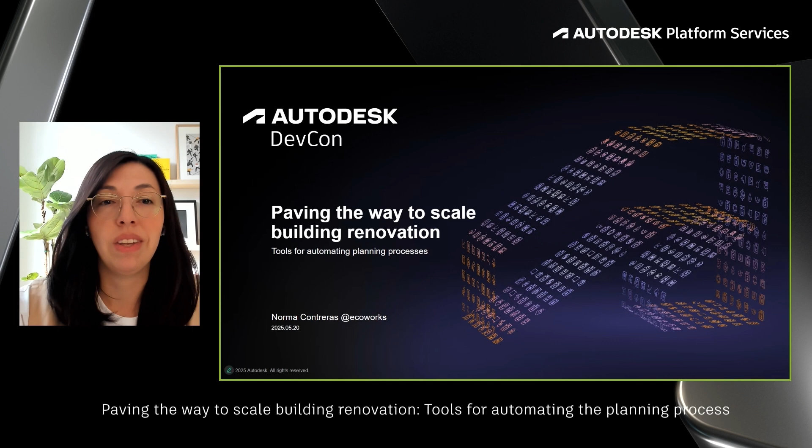A quick intro: who is Norma? I'm an architect from Mexico City, currently living in Amsterdam, and I'm a food lover. I'm passionate about design, architecture, editorial, graphic, you name it. I love details, and I'm constantly inspired and sometimes overstimulated by how design and tools are shaping our world.

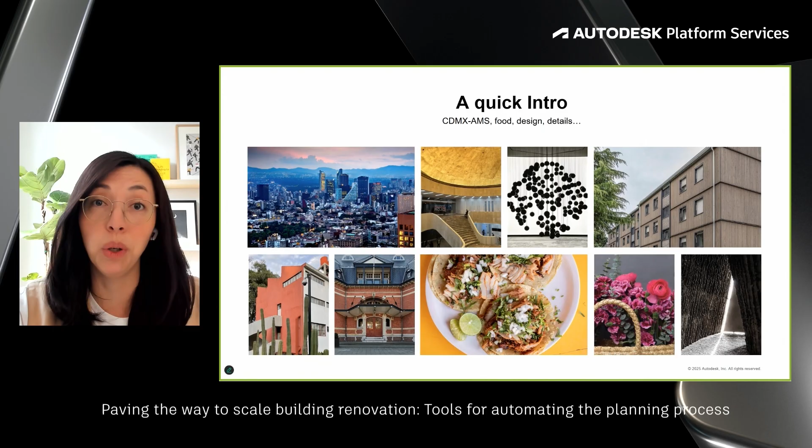I want to start this lightning talk with one question: have you ever felt overwhelmed by all the tech options out there to improve our processes? I do, and my team feels the same. So how do we choose or develop our own tools? Over the next few minutes, I'll share how we are navigating through all these tech options at ecoworks by answering three questions: why we want to optimize our processes, why we developed our own tool, the Revit TaskChain, and how the tool is working.

So let's start with the first question. We are facing a global housing crisis. We need scalable strategies. The European Green Deal is pushing us toward climate neutrality by 2050, aiming for Europe to become the first continent to have cut greenhouse gas emissions by 55% over the 1990 level.

In the Netherlands and in Germany, efforts focus on both new housing and retrofitting. I'll talk about Germany because it's ecoworks' current market, and the challenge is clear: Germany needs to triple its renovation rate to reach climate-neutral building stock by 2040. Something conventional methods cannot achieve.

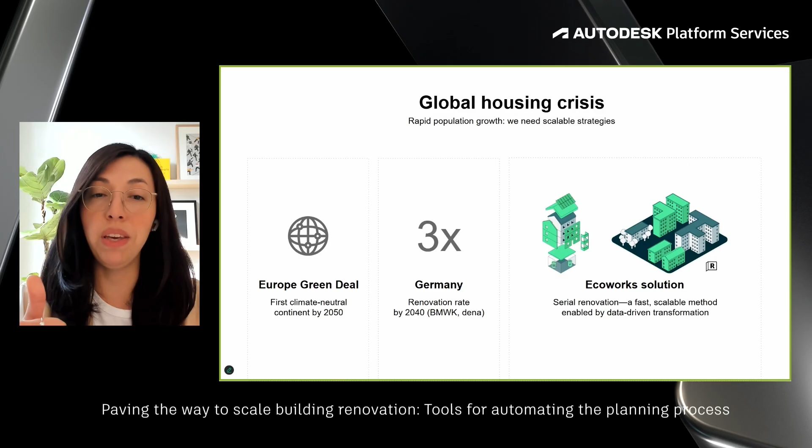Following with the second question, why did we decide to build our own tools? More software is about to be built than ever before. We have seen an explosion of new technologies. We have Revit APIs where users can prompt inputs, triggering cloud-based automations. We have Revit AI helpers, we have assistants. There's even a database collecting all the AI tools around the industry. And there are other firms and companies developing their own tools. With all these options, it's easy to get overwhelmed.

That's why the first step is always the same: clearly define one of your problems. For us, that means we need a repeatable process, a chain, streamlining planning, and automating Revit workflows.

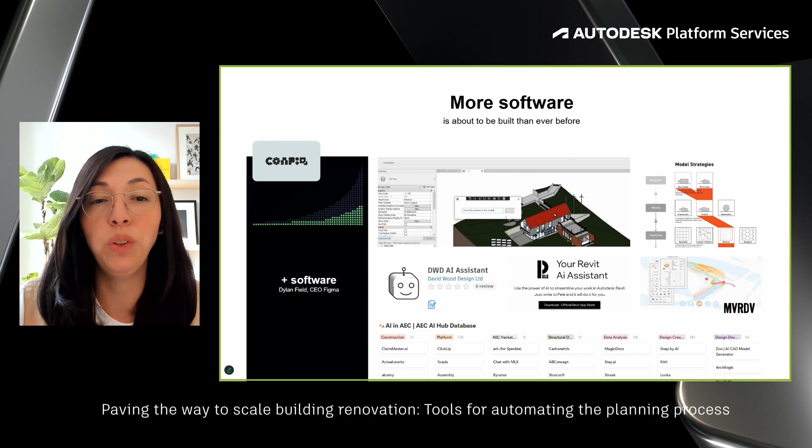So let's take a look at how the Revit TaskChain works. Think of it as a copilot guiding you through the planning process with structure and clarity. The tasks are gathered in our database, which feeds into the tool, generating a structured checklist.

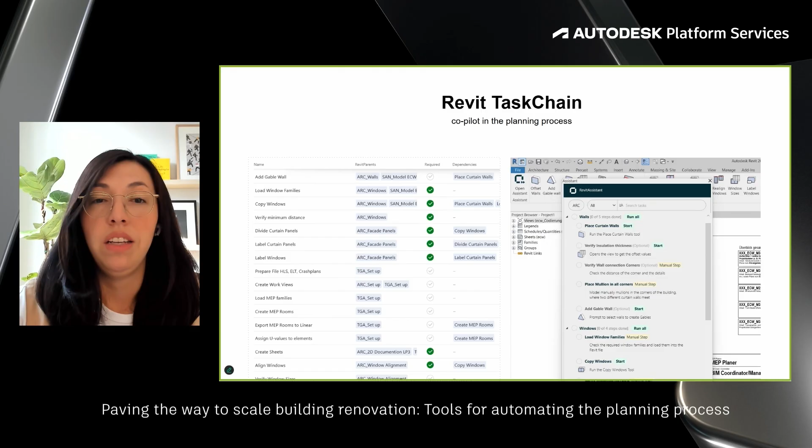So users can immediately see all the tasks they need to do. This structured list is color-coded, so users can immediately distinguish between automated and manual steps. When an automation is available, you can easily trigger it directly from the checklist. Under the hood, we are using Revit APIs to automate workflows, keeping the process consistent, standardized, and reliable across projects.

Here we have a real game changer: the tool, the Revit TaskChain, evolves with every project. It is a living tool. The user can update tasks and refine workflows. It's more than automation—it brings consistency, quality, and also the right amount of flexibility, making each renovation smoother than the last.

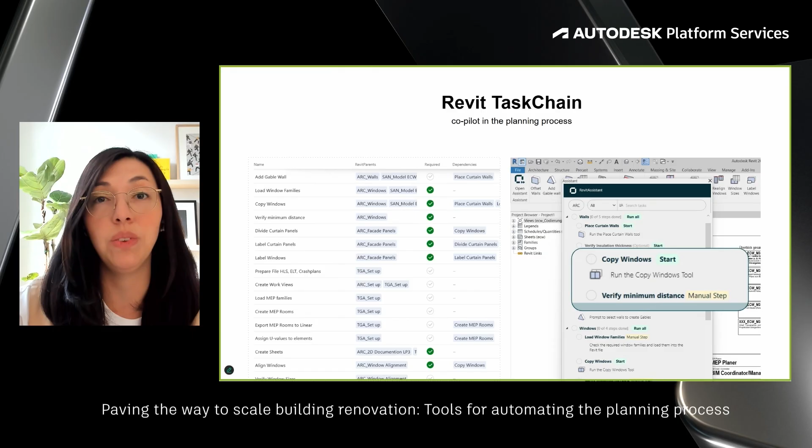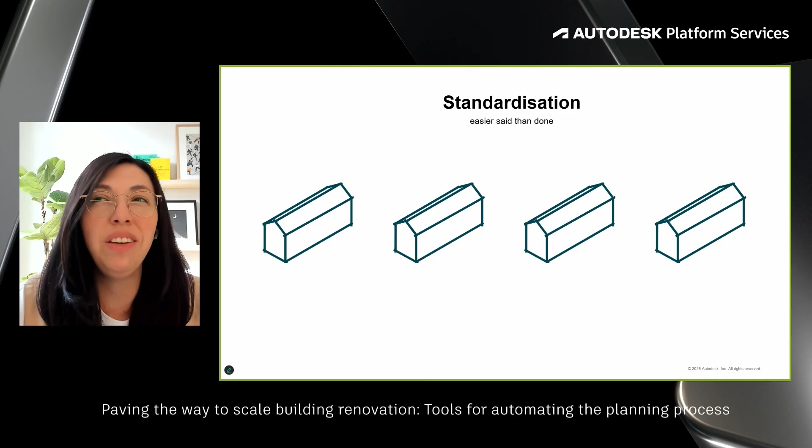To achieve this, we need standardization. But as anyone in this field knows, it's easier said than done. Think about German buildings from the 1960s and 1970s. On the surface, they might seem identical—spoiler alert, they are not. Small and often undocumented construction details shift how we plan, and these slight variations have a big impact on how we are planning.

So we have to ask ourselves: how do we optimize this complexity? How do we keep things scalable and adaptable? How do we combine everything into a chain? That's where our tool comes in. Let me show you our tool in action.

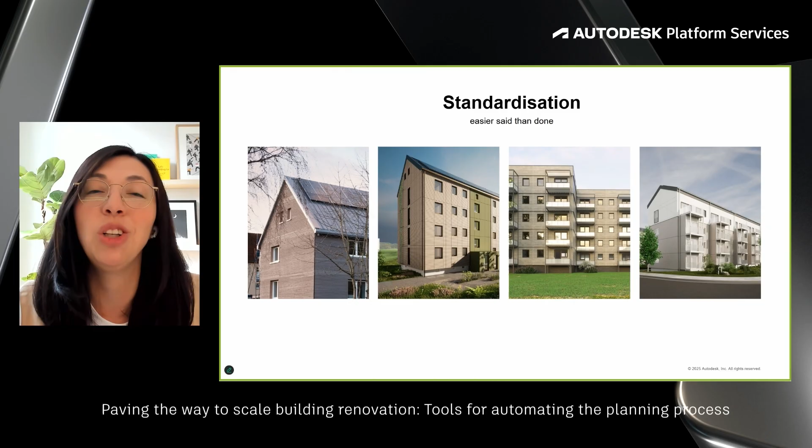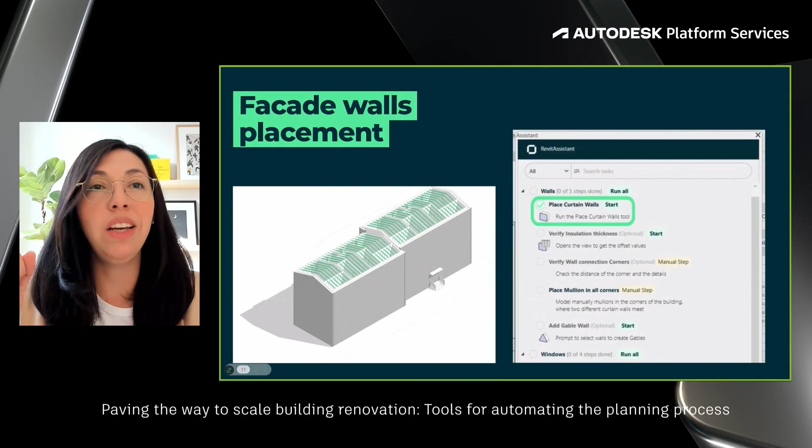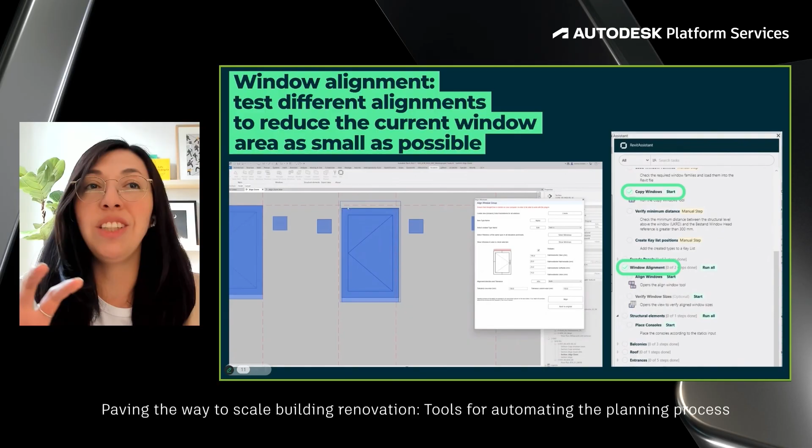Since we primarily work with Revit, we built a custom add-on that brings our modular approach directly into the modeling environment. The user can automatically place the facade elements, copy the window's position because we are transferring the existing dimensions into our ecoworks products. You can also test different scenarios of alignment—horizontal, vertical, or both directions—and the user is also able to place the structural elements.

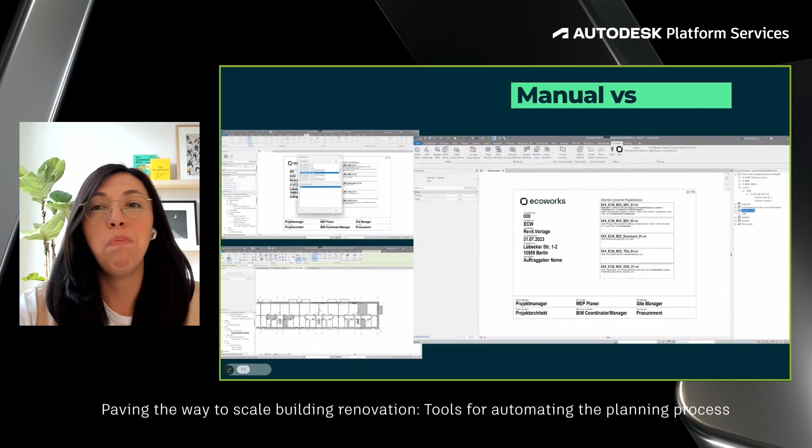But beyond all this modeling, our tool also supports the deliverable creation. And by connecting these tools into a chain, we are able to reduce planning time and effort without compromising precision.

Over the past two years and more than 20 projects, our team has been gathering, collecting, clustering, and filtering all these different tasks to define the right models and the standards.

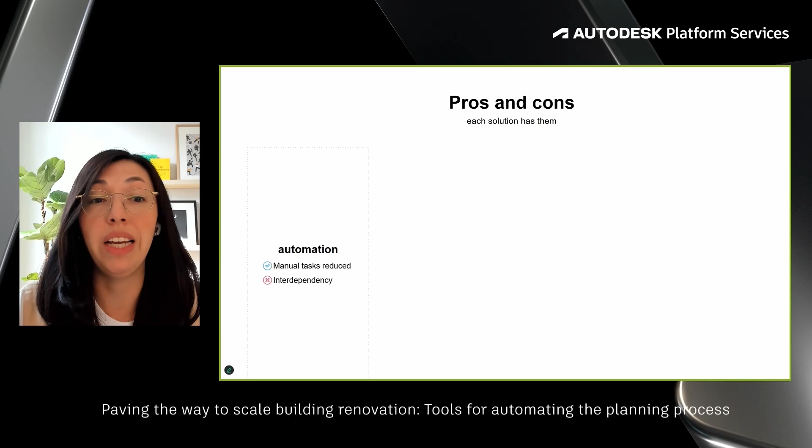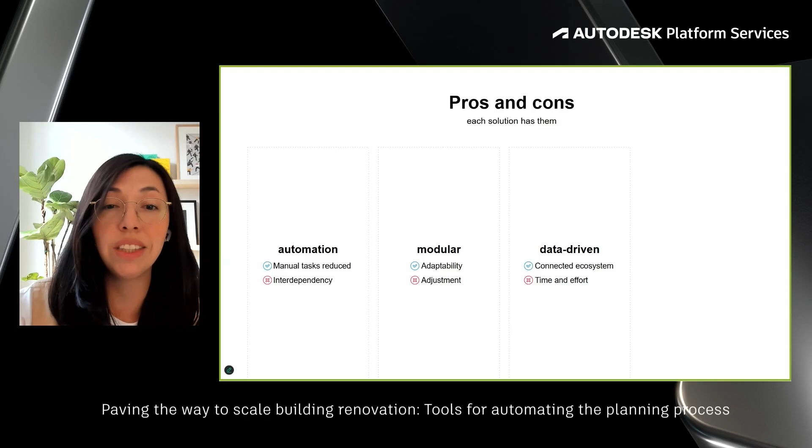But like any approach, ours comes with pros and cons. Yes, we are doing automation, so we are reducing manual tasks, but we are adding a layer of complexity, which is the interdependency between tasks. We have a modular approach, so we become more adaptable across different projects, but we need constant tuning to fit project-specific conditions. Through the data-driven approach, we built a connected ecosystem through Autodesk Construction Cloud, ensuring consistency and flexibility, but it requires time and effort to collect and structure the data.

But one thing stands out: we are making the data accessible. Users can connect and optimize workflows without knowledge of programming. So with this, we are boosting transparency and collaboration, not just in construction details, but throughout the entire process.

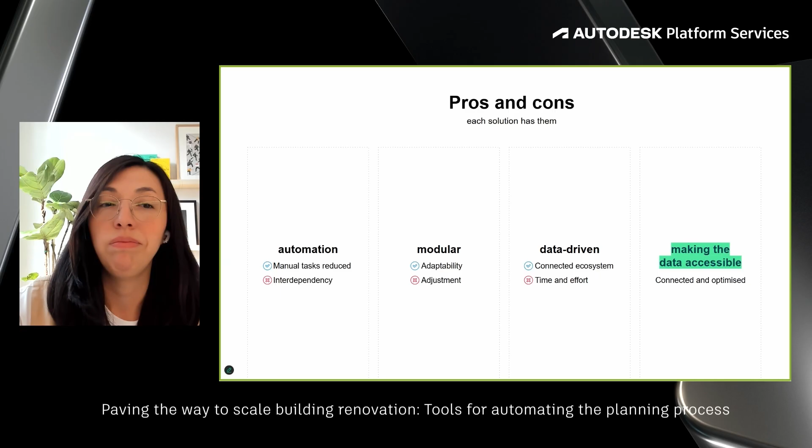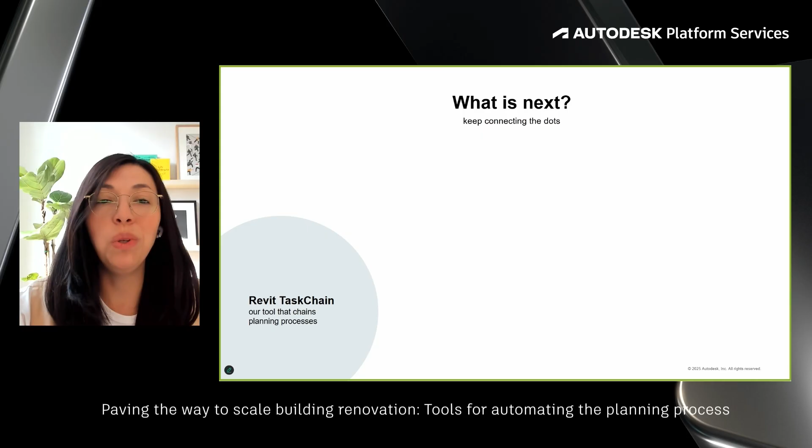So what is next? What made this project successful wasn't just the tool—it was our ability to understand the challenge, work with the data, and connect the dots. That's how the Revit TaskChain came to life, by condensing these tasks into a streamlined and repeatable process. In doing this, we support one of the ecoworks pillars, which is standardization.

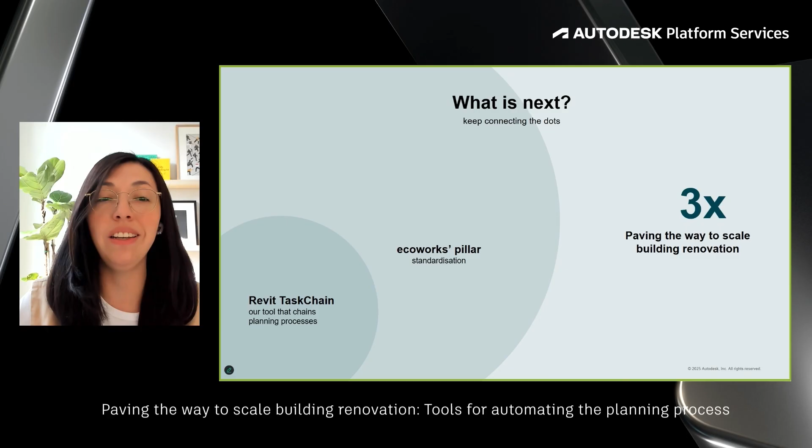And this is how we are paving the way to scale building renovation. Thank you for listening, and I cannot wait to see you at the live event in May.